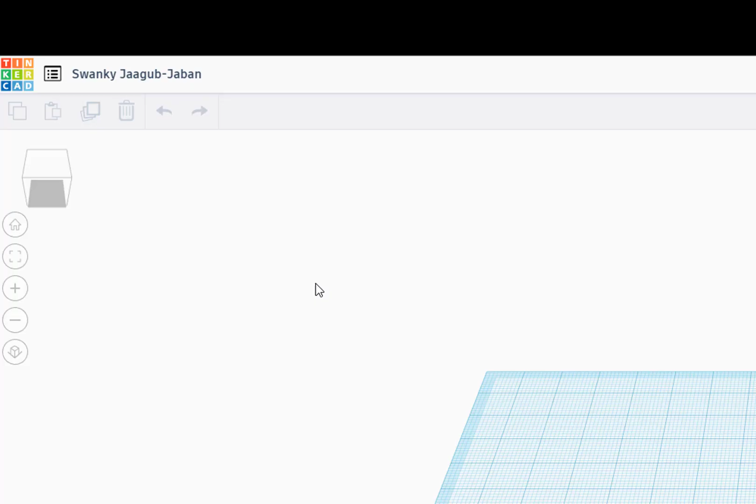Once in TinkerCAD, we want to click Create New Design. The first thing we do when it loads up is click at the top and rename that.

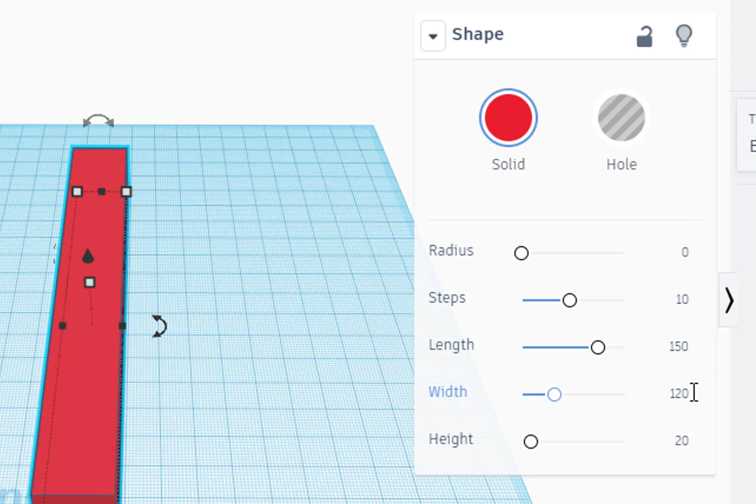Now we need to make our base plate. I'm going to grab a box and put it in the TinkerCAD workspace. This window will pop up. We want to set our length to 150 millimeters, our width to 120 millimeters, and our height to 20 millimeters. That's going to create our basic plate, and I'm going to move that onto our workspace. This is what we're going to put our face or attach our face to.

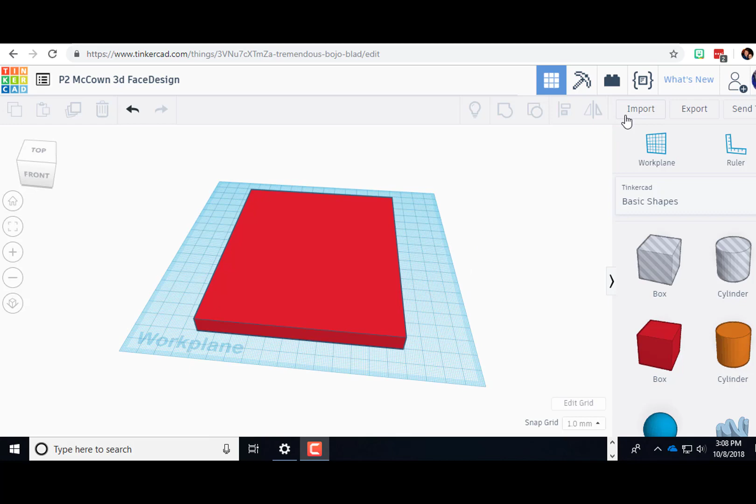Now we need to import our OBJ file. Go to the top right, click on Import, and you can drag it in here, or you can click Choose a File, then go to your Downloads, and inside your Downloads you should find your OBJ file. I have a bunch of letters and numbers. Click Open, then click Import.

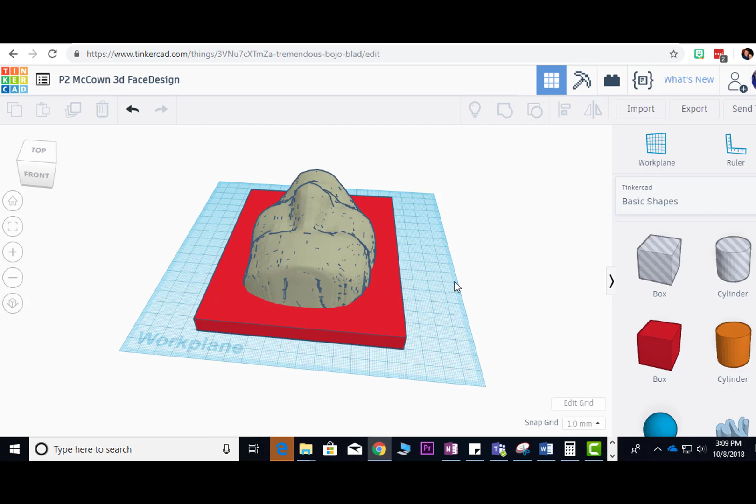The import step takes a little bit of time as it's doing the entire scan of your face from the picture. Now we're going to rotate around.

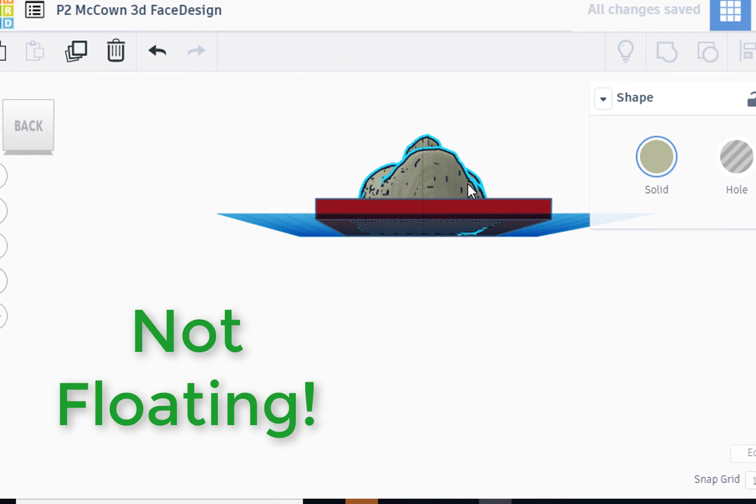You can click on the face. You can move this forward, backward. You want to try and center it. If you need to shrink it a little bit, you can grab from the corner to shrink it. You want to make sure that it's not floating. So I'm looking here, it's not floating off the edge. Nothing is sticking through either.

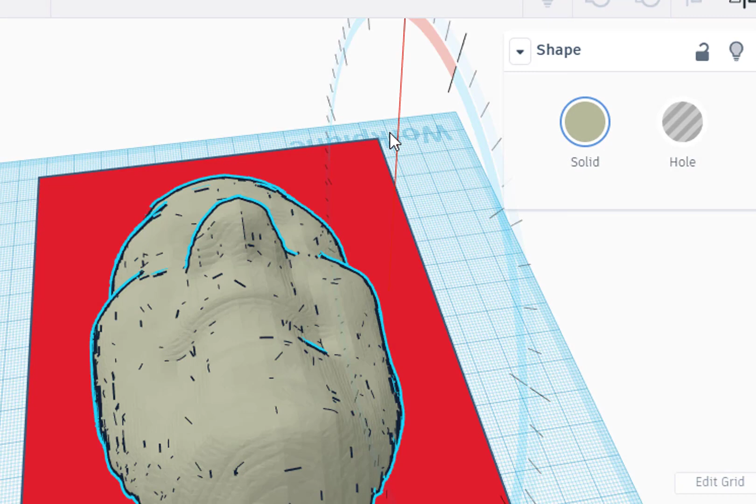If it's not centered, you can click on it and you'll notice that you'll have some arrows. This can turn it left or right if your face is looking the wrong direction. The other side is tilt back or forward. Again, if you need to make adjustments, that's where you can do it.

You want to make sure you have enough room. Put your initials at the bottom. Make sure you have it centered and that there is some space between the edges.

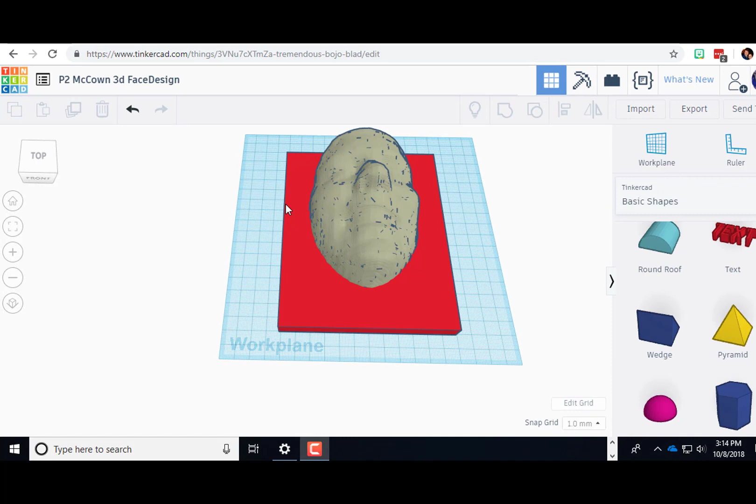This last part, I'm going to go over and select text. I'm going to drag it out to here. In my text, I'm going to put my initials, and I might change the height. I'm going to put mine to 15.

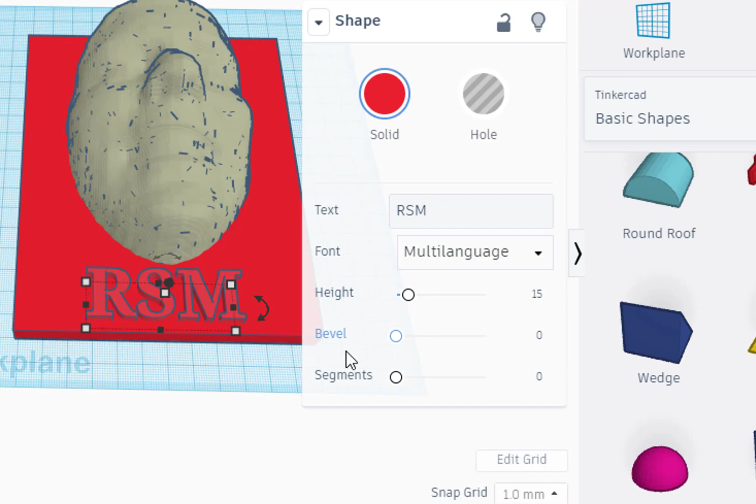Alright, I can now scroll down, look at here. Is it raised up? Nothing's floating. Looks good to me. Now, let's say I'm ready to export.

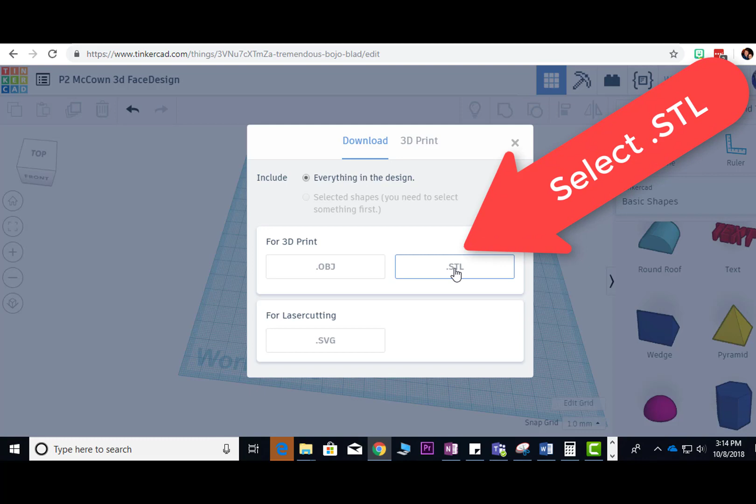So I need to go up to the top right, click Export, and select .stl. Again, .stl. When it finishes in the bottom left, you should have the download of your .stl.

This file, P2 McCown 3D Face Design, is our 3D file. You can turn that in via Teams, you can put it on a thumb drive, but this is the file that has to go to the 3D printer to get your face printed.